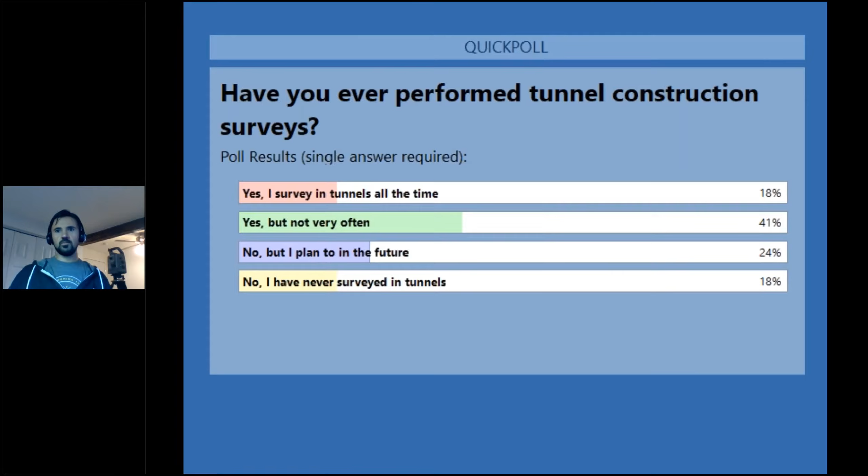All right, so I've got myself on webcam, hi everyone, and I've got my trusty Total Station in the background, which we're going to be using today. But first, we're going to go over a bit about tunnel construction, and then talk a little bit about what NATM tunnels are and the surveying involved. So let me dive into the slides here.

So why do we build tunnels? Well, there's really three categories: transportation, public works, and mining. In transportation, this is all about moving people by road, rail, or metro. In public works, it's more about moving resources—how do we get things like water, wastewater, utilities, and oil moved around? And in mining, it's all about resource extraction and moving that material in an efficient way. They all have different types of challenges and needs, both from the construction, design, and survey perspective.

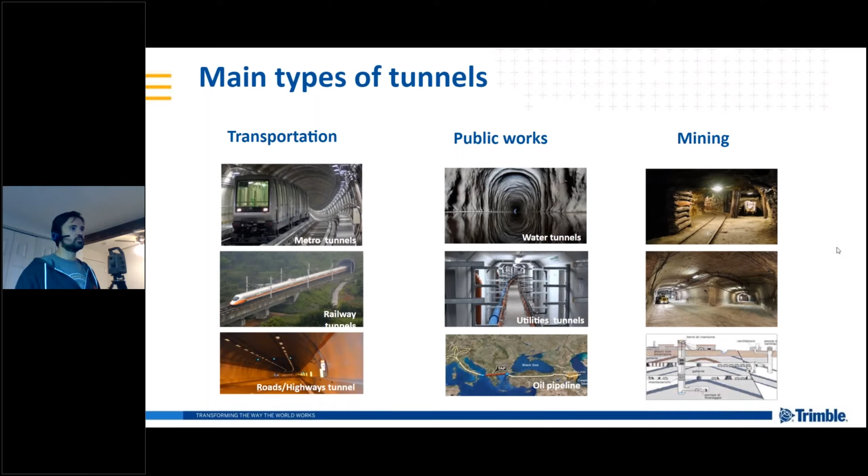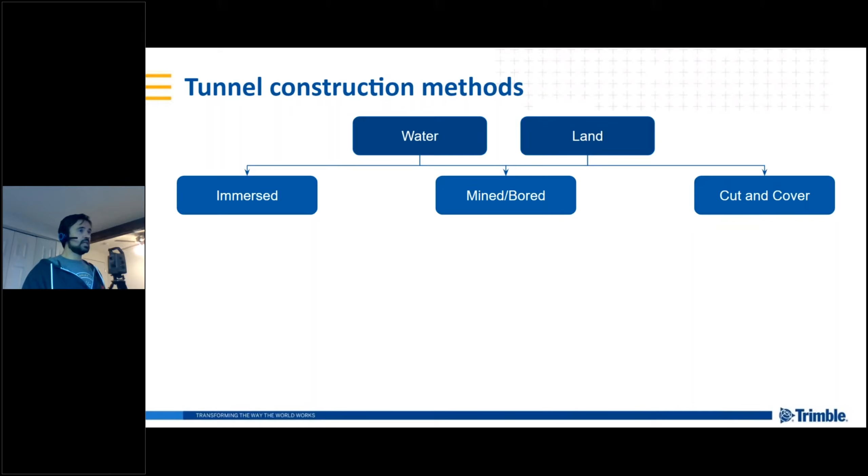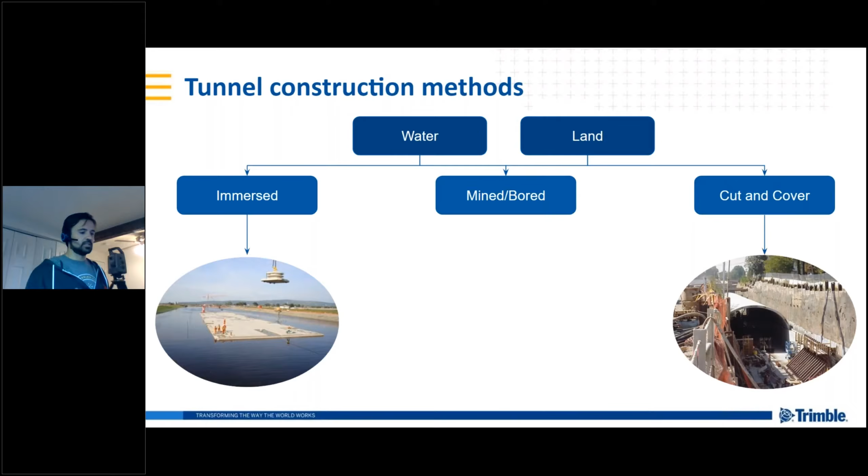Now let's look at some of the tunnel construction methods. This isn't the most comprehensive list, but we're trying to nail down the most prevalent methods used in the industry. They really depend on whether it's underwater or on land, and from there we look at three broad categories: immersed tunnels, mined and bored, and cut and cover. Immersed is when we take prefabricated segments, float them out to an area, and submerge them to the seabed before covering them up—that's why it's called immersed. Cut and cover is where we go from the surface level, cut down to where the tunnel will be, and then backfill after that tunnel structure has been created. It was typically quite prevalently used, but it's getting less common because of the environmental impact required to build that tunnel.

And then we'll look at the mined and bored category. There are three methods here, and the first two are probably the most prevalent used. The left-hand side is the NATM, or sequential excavation method, and that's what we'll be talking about today. In the middle is the TBM, or tunnel boring machine method, one of the fastest growing and popular methods of tunneling, as well as pipe and box jacking, which is used a lot in microtunnels and smaller diameter tunnels.

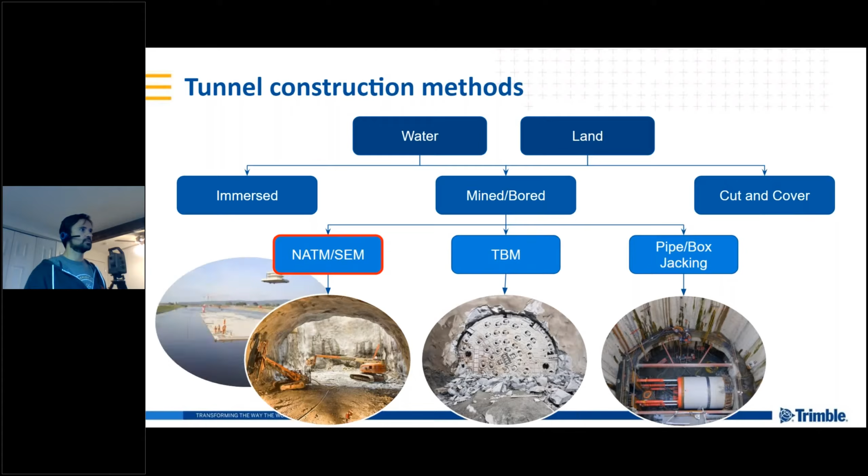So getting into the NATM method, or the new Austrian tunneling method, also referred to as the traditional method—it's a combination of drilling, blasting, and excavation to create the tunnel.

This can be through a variety of means, but I'll go through the general process, which is starting by marking and drilling out the holes in the tunnel face for charging, detonating those charges to break up the material, ventilating to get rid of all the dust and debris so it's safe for people, and excavating that material, removing it by loader or other means, typically called mucking in the slang term.

Then there's installing temporary support. This could be the arch, the ribbing along the side, usually surveying for the next section to understand the geology as well as how much material has been removed, and then reinforcing, usually by shotcrete, rock anchors, and a variety of other things.

This is repeated every so many meters depending on the geology and the surface. It could be every meter that we have to do this process, maybe every 5 meters. So it's a very iterative process.

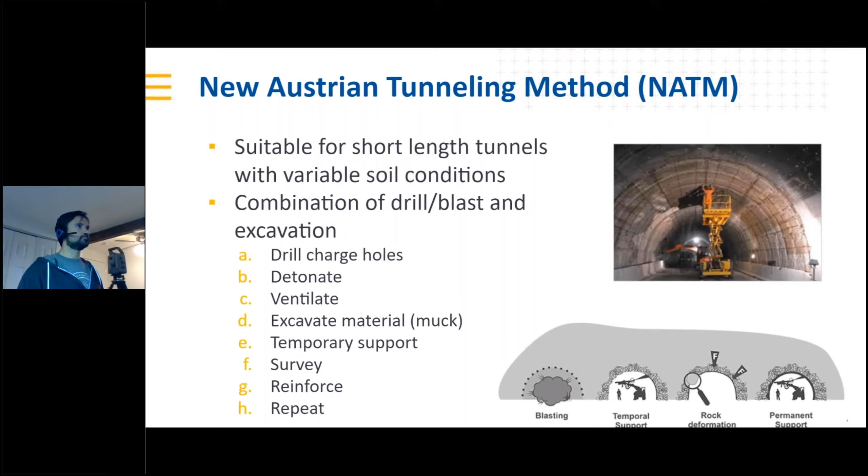Next, we're going to look at the workflows from a survey perspective that are used in tunnel construction, specifically in NATM. There are other things, I'll generalize these into categories, but I would say one of the most important categories is the geodetic and control survey, typically starting from outside and going into the tunnel.

Outside, it might be using GNSS static at each end of the tunnel to establish a good baseline for the control. Then as construction progresses, we move the traverse network into the tunnel, following along with the construction process. This is a quick, timely, and important process that needs to be performed.

There's multiple ways of this being done, and especially trying to maintain accuracy over long distances is a big survey challenge, and there are some different ways that that is done.

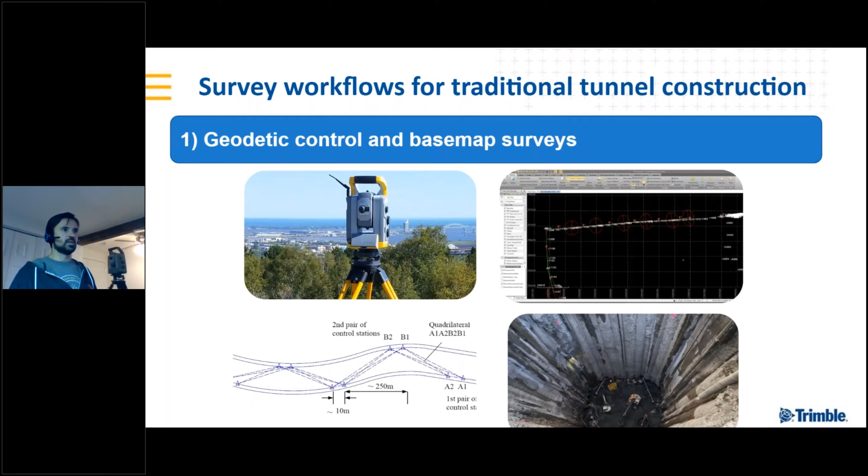Next, once the tunnel is started, we've got the control network established up at the top. Now we start to do the drilling and blasting, as well as measuring how much material is being excavated. This is guiding the drilling jumbo to drill and where to charge in the face of the tunnel, as well as collecting data on how much material is removed and helping the shotcrete crews and the reinforcement crews to put those rock anchors in and the proper amount of shotcrete.

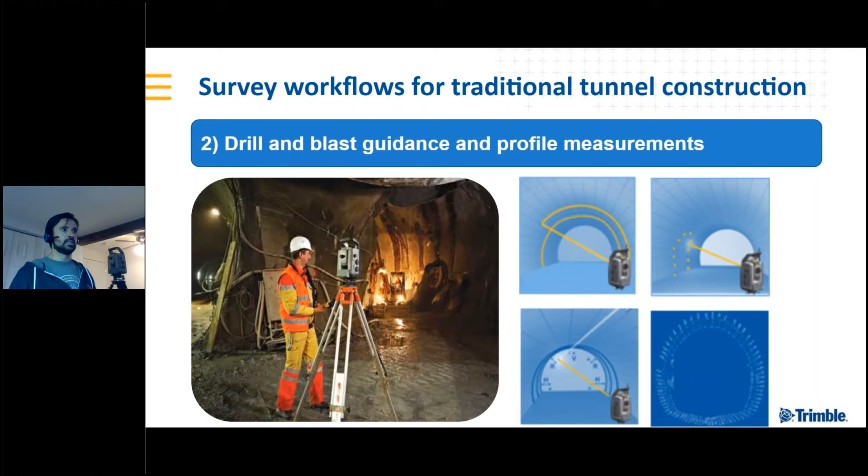Another key part of really any tunnel is deformation monitoring. This happens both in and outside the tunnel. Outside the tunnel, this is about understanding, alarming, and reporting to the necessary stakeholders all of the key infrastructure that is around and above the tunnel. This could be as simple as understanding whether a building is moving while the tunnel is being bored underneath.

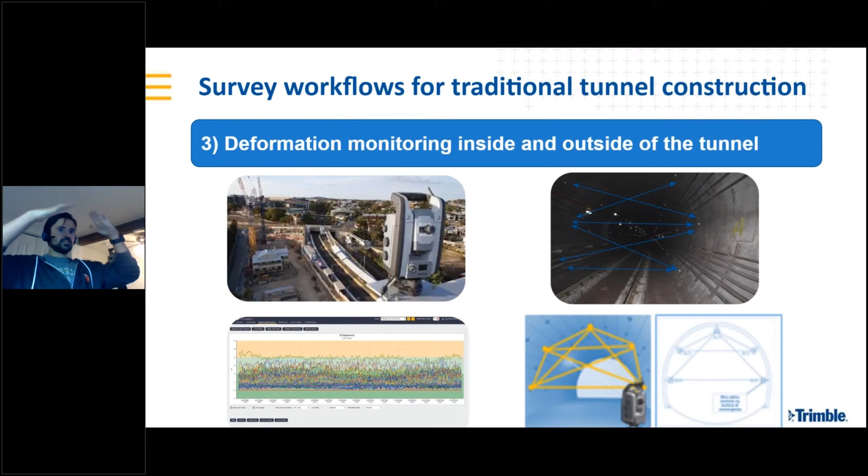Inside the tunnel, this is more about understanding the shape of the tunnel after it's been excavated, how it's deforming at key points. On the right-hand side, I've noted some reflector targets on the side of the tunnel. Those are measured in a campaign-based style monitoring and checked for movement relative to each other to understand if the tunnel is collapsing, maybe at the bottom towards the inverts, or at the top, getting a better idea of that movement.

The fourth and final category is more of the feature staking and the final as-built. So what is that tunnel actually for? Is it a road? Then we're building in the sidewalks, any drainage, putting in the asphalt, and all of the necessary things to essentially finish off the tunnel. It might be utilities overhead and ductwork, a variety of different things. This is where we see more and more scanning, 3D laser scanning being used as well.

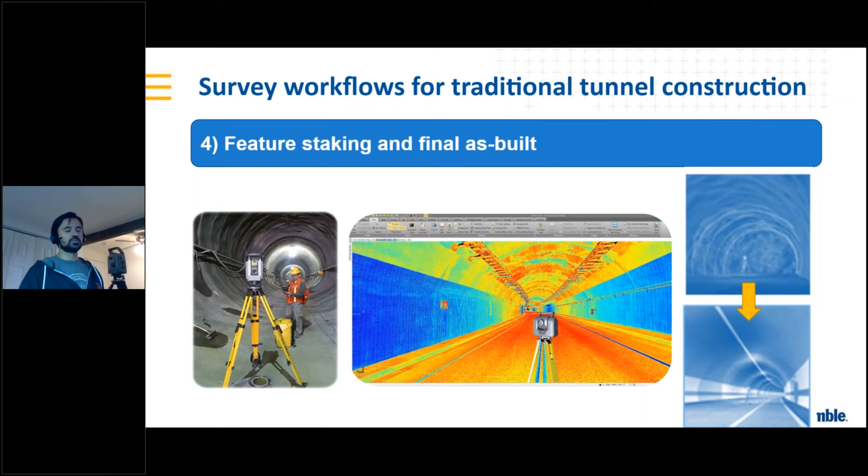So with that, we're going to go into a demonstration. First, I'd like to cover what the demonstration will include. First, we're going to start in Trimble Business Center, where we're going to use the tunneling module to essentially do data preparation and prepare our design for going out into the field.

And then in the field, transferring that design can be through a few different methods. It can be using Trimble Sync Manager, or it can be through the classical methods of a USB or email to the data collector approach.

Once it's in the field, we're going to be using Trimble Access Tunnels and the S-series total station. In this case, I have an S9 total station, and we're going to first review the design and make sure that everything that came or was in TBC came into Trimble Access.

We're going to do the setup of key points, so for rock anchors, blast holes, that kind of information, as well as machine positioning, really useful for drilling jumbos. And then we'll do an auto scan.

So how do we collect profile data for understanding the volumes in a more automated fashion, and then some in-field reporting as well. From there, we'll take that data and transfer it to Trimble Business Center tunneling module, where we'll do an as-built analysis, a more complex understanding of the data collected in the field, and overbreak and underbreak reporting. And if we have some time, we'll also get into cross-section and sheet creation.

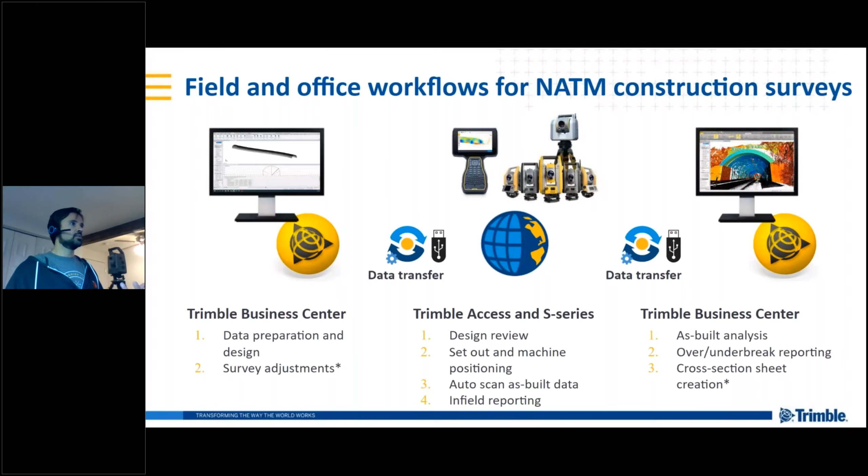Now where do we go from here? We're going to go to the Tunnels tab in TBC. I really like the layout because you progress from left-hand to right-hand side in a workflow sense—so we've got our tunnel alignment. You could also edit the alignment and create labels for that alignment. What we're going to start with is creating the actual tunnel design.

So first you create a tunnel corridor, which I like to think of as a container for the tunnel design. If you have multiple tunnel designs, for instance a northbound tunnel and a southbound tunnel, you could put both of those in one corridor—that's the primary use for it. So we'll start by naming that corridor. We've already got our alignment selected. Press OK.

And then the next thing is to create the tunnel design. You'll see on the left-hand side, as we go through creating the tunnel design elements, that they'll populate in the Project Explorer tree over here.

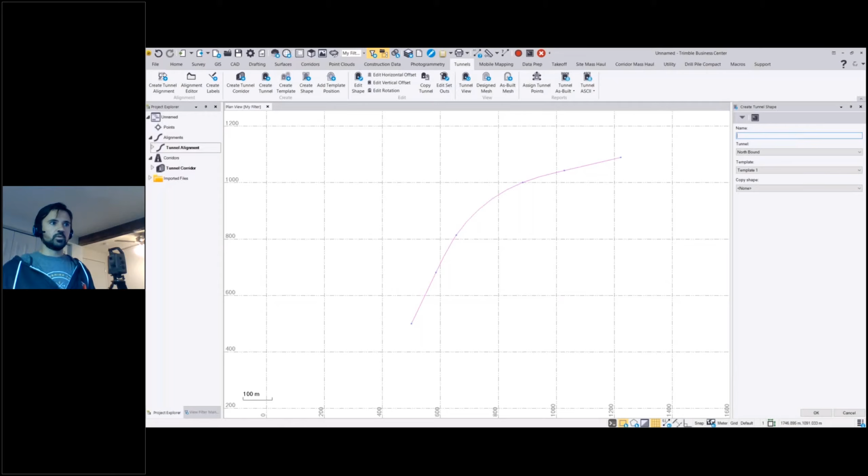So this is the geometry. If you're familiar with corridors in TBC, this is like your cross section - essentially the same thing. You're defining how that shape looks, and you might have multiple shapes. So in that template, you might have 1, 2, 3 shapes, and why that's important is shape 1 might be your outer diameter, your excavated surface, and shape 2 might be the inner diameter. It might be finished lining, might be shotcrete surface - could be a variety of different things.

So let's just call this outer diameter for now. And once again, if I had an existing shape, I could copy it, but I don't, so we're going to go from scratch.

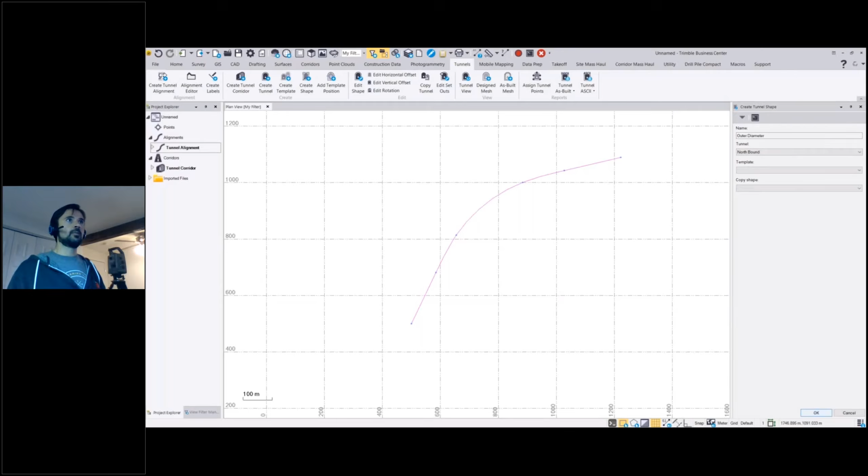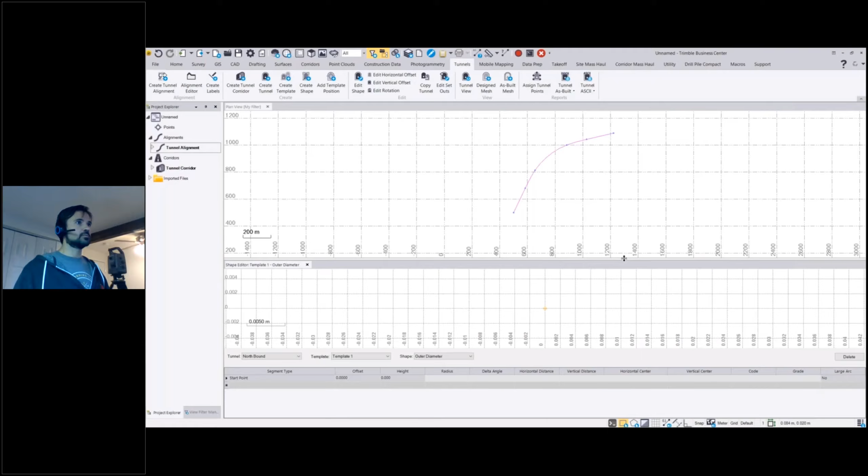A lot of the time you might be just given a stack of plans with all of this information on it and not have a design. So this is where using these tools in TBC is really helpful to get this data prepped, ready to take out to Trimble Access. If you're power users of TBC, you probably know this, but you can drag views around. So I'm going to drag the shape editor here up to the top, and I'll just close the plan view, so now I've got a bigger area to work with here.

So first, the view at the top is essentially our cross-section view, and we're going to add elements. We're going to start with a start point, and I've got some notes here of what kind of design I want. So we're going to start by creating a start point, and you'll see that populate in this view as we go through. The first thing I'm going to do is a line - there's a variety of different options here for creating different geometry elements for the design. I'm going to use a simpler one, line elevation and offset.

So in this case, let's see, I'm going to go -0.5 and create that. And now you'll see automatically that line created in the view. So I'm going to go ahead and create some more elements.

Might be a good time - I don't know if there's been any questions, Jeff, but if there has been any, feel free to pop those up and I can answer them while I do these. Yeah, we had one other question, but I'm waiting for some more detail around it. Sure, when that comes in, I'll go ahead and ask.

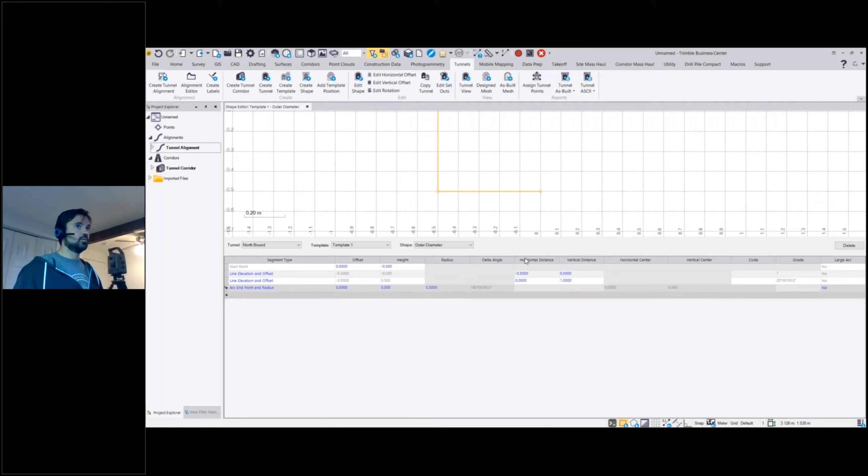We did have another question come in from Hassan: does TBC have a module for deformation monitoring? The answer to that is not at the moment - good question though. I think we all want to see it, Hassan, so I agree with you.

All right, and then here's the last point to finish off our tunnel design - so kind of what I would call maybe a standard horseshoe shape type tunnel design. So we've got all those elements keyed in, we can kind of view that before we do anything else. Awesome, we've got that tunnel shape ready.

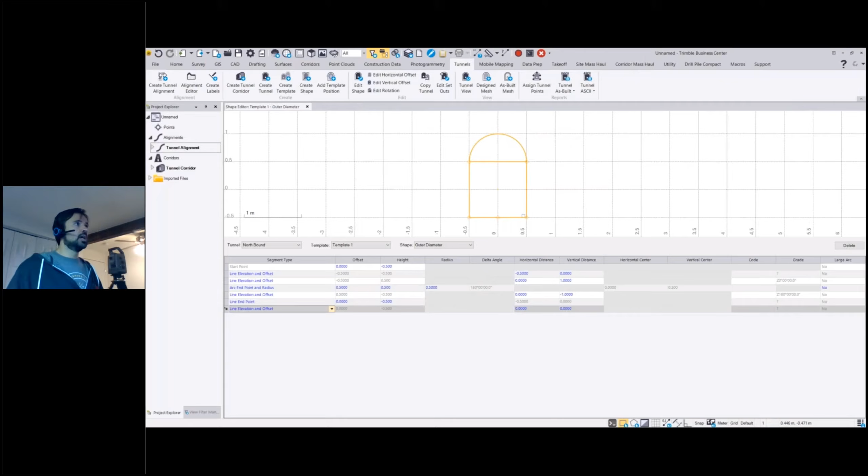The next thing we can do is visualize that in 3D. So here we've got the design tunnel mesh tool - click on that.

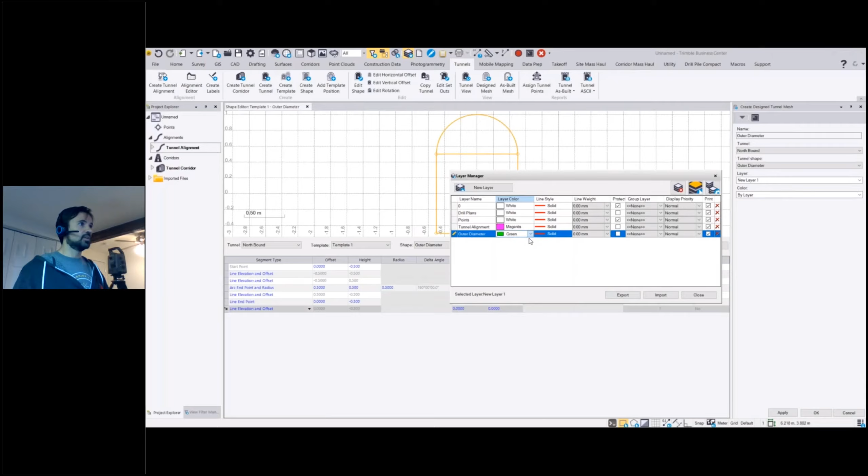And you select your tunnel shape and give it a name. I'm going to call it outer diameter. If we want, we could put it on a layer. One thing you might not know is if you press spacebar, it'll automatically bring up the layer manager. It's kind of a tip and trick in TBC that I like to use. Let's give it a fancy color so we see it well.

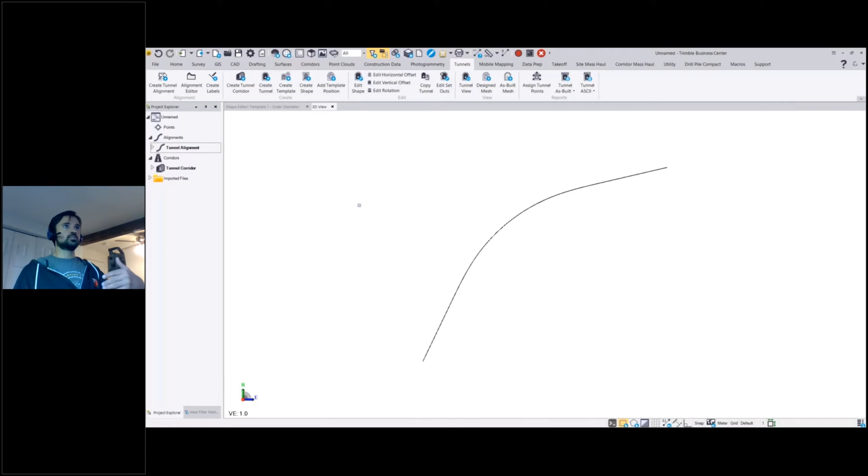You're not going to be able to see this because I don't have a view open, but that's fine. So at the top, we're going to click the 3D view. Now you'll notice we've got a 3D mesh of our tunnel design. It's taking that shape, taking the alignment, and creating a 3D mesh along the whole alignment. You can see that in any of the views, plan view, 3D view, station view, they're all there.

Next, what I'm going to cover is a workflow that's more prevalent in NATM tunnels, which is set out points. These would be key features like blast holes. They would be set out points for rock anchors, reinforcing the sides of the tunnel. They're similar in a sense to stakeout points in terminology, but set out points are more for tunnel specific workflows.

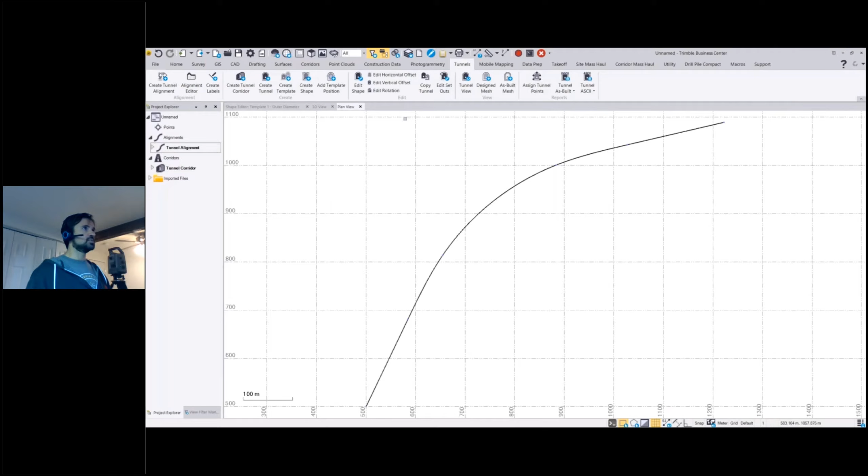So in TBC we've got this Edit Setouts. I'll hit that, and that'll open up another cool thing, the tunnel view. If you're familiar with the TBC tunneling module in the latest version, 5.3, we did some updates to the tunnel view to make it a more comprehensive way to view all your designs, shapes, set out points, offsets, and rotations, all in one centralized view. So I'm going to go through that and you'll see some of the new things as I do.

On the left-hand side, there are options for the shape. If I click on shape, you'll see the existing shape I've already created. But what I want to do is the set out points. There are essentially four different types. The radial is especially used for rock anchors - you're essentially projecting out an offset based on the center point, radial out to meet the tunnel design. You'll see what I mean when I enter that point.

So let's start with that. We'll go radial. You put in a start station and an end station. If you wanted this applied at a range of stations, you could do that. In this case, I'll just put it at 1200 for demo's sake. Then you apply the offsets - I've got some offsets here. You could also offset that center point which the radial will be projected out from. In this case I'll leave it at 0. Then the last thing you need is a shape, so I'll select my outer diameter shape.

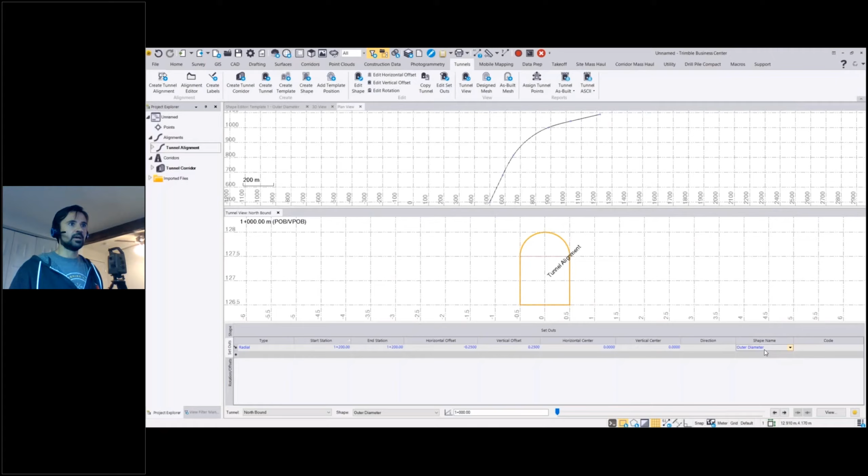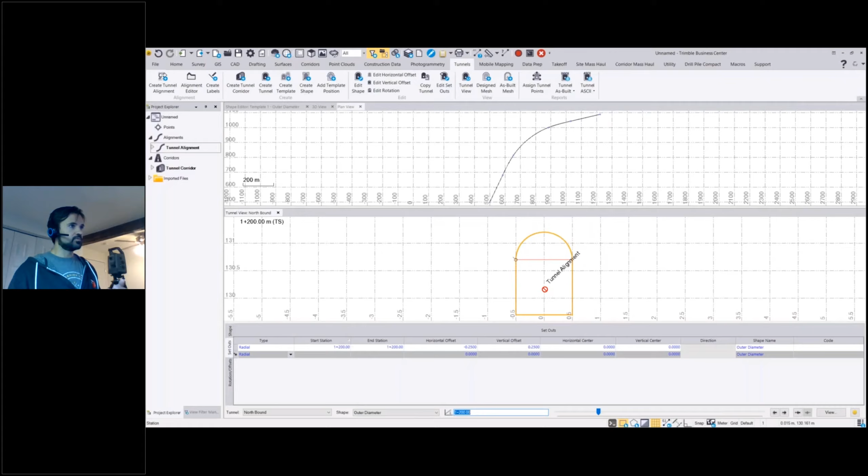And see it's computing that. Now, I don't see anything right now because it's at station 1000. I can navigate using the slider at the bottom, which goes through the whole tunnel, but I want to input that station directly. So let's go 1200 there. Now you'll see that point here - that's the radial set out point I've created. It's essentially gone from the alignment and projected out at that offset to meet the tunnel design.

Next type we'll look at is the horizontal. Same thing - put in some stationing, and it only requires a vertical offset here and then a direction, so is it going left of the alignment or right of the alignment. Let's do left, and then the shape. Now if I tab to the next one, you'll see that's created. So as it sounds, horizontal - instead of projecting out radial, it's projecting out horizontally in that direction.

Likewise, there's a vertical - same principle. It's going to project that out in a vertical manner. I'm going to have this one project up, and now we've got a vertical point as well. Then the last one, which I think is quite common, especially in NATM tunnels when you're marking out blast holes on the tunnel face.

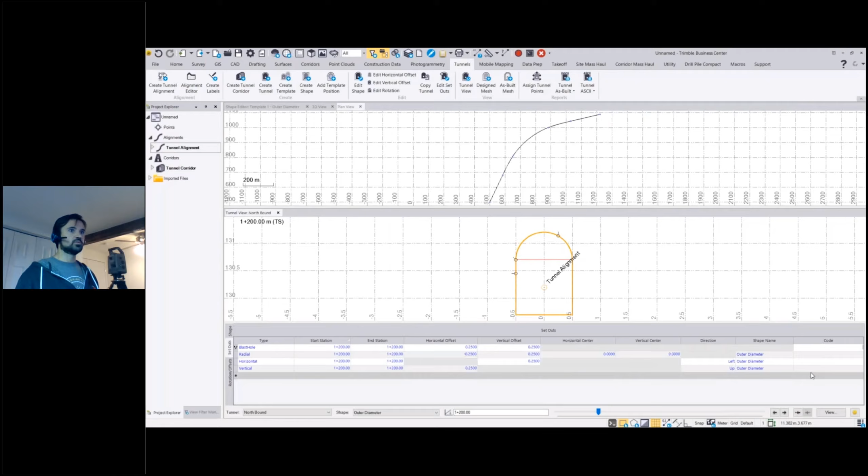Same process - you enter... had some issues there. Start station, end station, and the proper offsets. You don't need a shape for this one because it's just going to strictly apply that to the tunnel center. Oop, looks like I'm missing it somewhere. Let me try and create that one again.

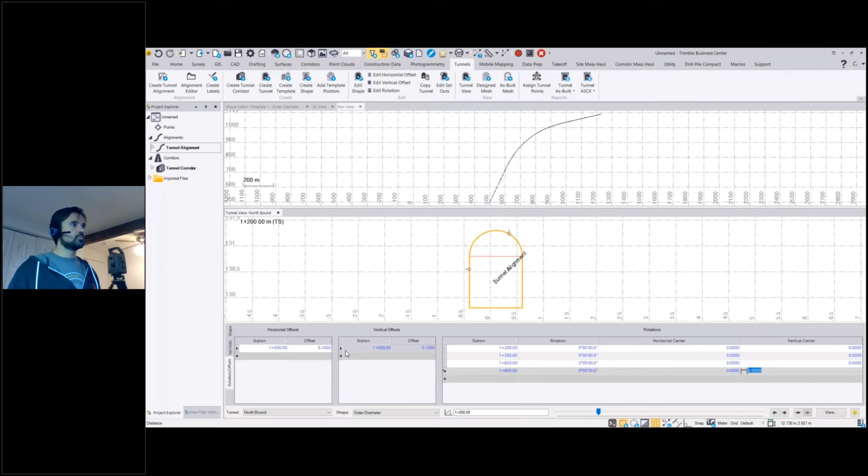Cool, so now with the little slider bar, I can see how that looks. You'll notice as I slide across, that design tilts 5 degrees and then it'll tilt back. The reason I show that is it's quite common, especially in metro or road tunnels, where you have to rotate along curves to counteract those forces going at speed.

All right, so we've got the setouts, our offsets, our rotations. The one last thing I'd like to cover before we get into the field aspect is multiple shapes. In this case, we've got one shape, but let's say you wanted an inner diameter surface - we can call it the shotcrete, or the tunnel lining. Easy way, you can go to the Create Shape menu and create another one.

We'll call it inner diameter, and use this copy shape function. So I can select any existing shape - we'll use the outer diameter and just apply an offset. If I know the thickness of shotcrete is going to be, let's say, 0.1, I can put a negative 0.1 offset and hit OK.

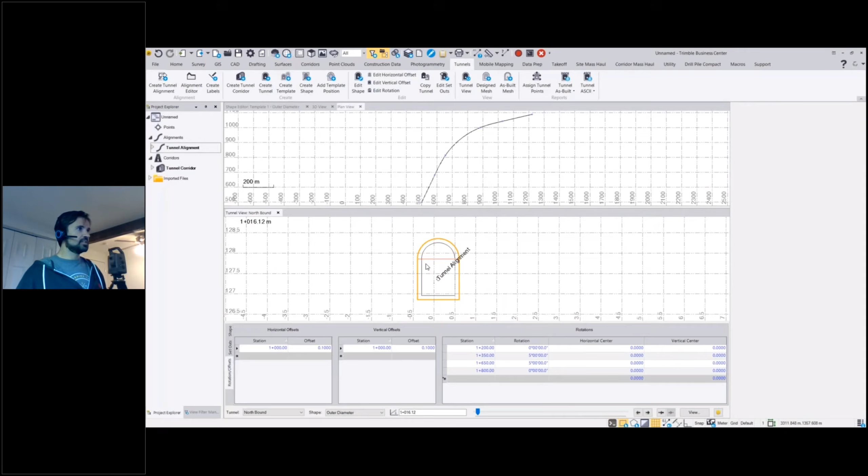Excuse me. And now in the tunnel view, we've got both shapes. Let me close that shape editor. In the tunnel view, we've got both shapes, the inner and outer diameter.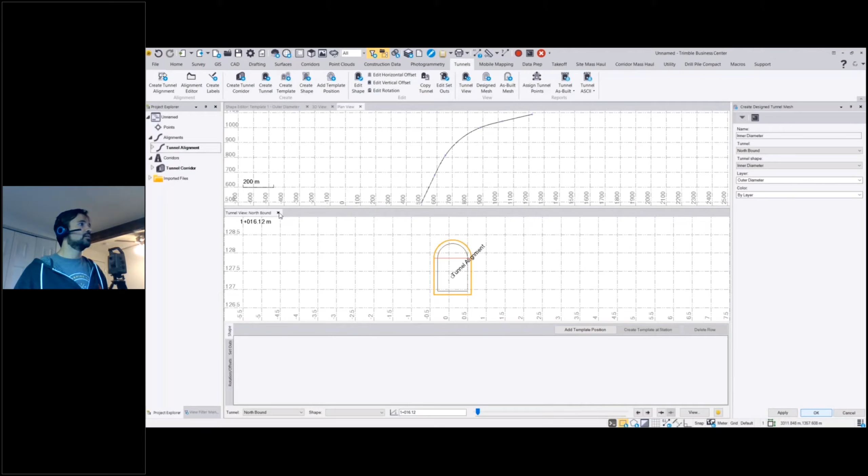And likewise, you could create a design mesh for that inner diameter as well. So I can press OK, create that, and now if I blow up the 3D view here - they're the same color, but let's change one of these to make it a little more clear. You have both shapes, so you can have multiple shapes in a tunnel design.

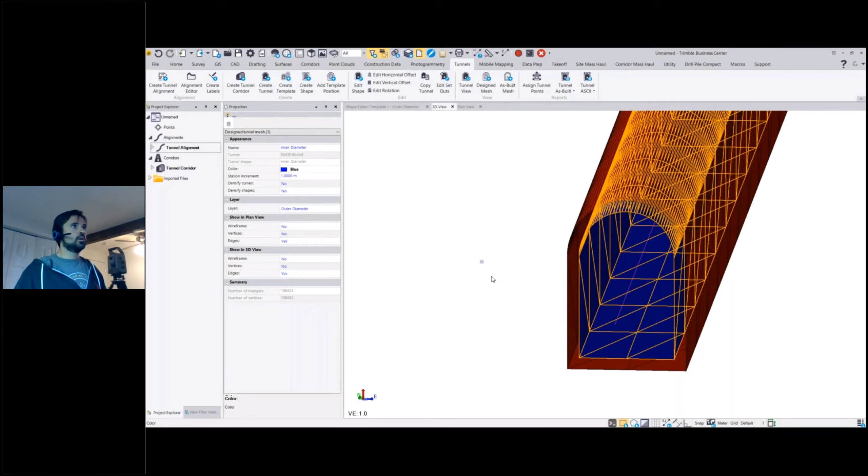All right, so we've got all of our tunnel design data prepped, ready to go for the field. The last step is to get that out in a format. We've got an export format between Trimble Access and TBC called the TXL, or Trimble Tunnel XML design template. Under the export menu under corridor, you'll see the TXL tunnel exporter. You select all the necessary information, then export out, and you'll have that .txl file, which you can bring into Trimble Access.

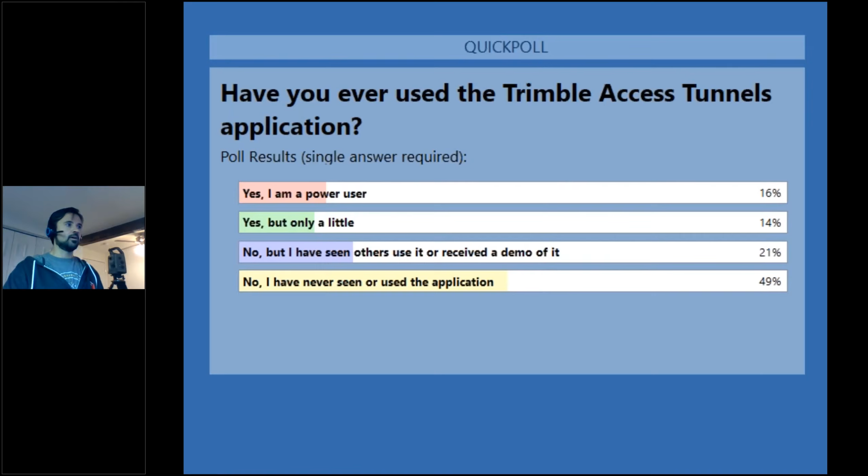You can probably see if my webcam is still operating. I've got an S9 set up here, connected to Trimble Access, with that tunnel design. I've got the total station set up with a simple backsight setup, and I'll be using the laser pointer today, no prism, pointing at my wall here in this room.

If you're not familiar, in Trimble Access we've got several different modules you can use aside from general survey, which is the one most people are familiar with. The one we're going to cover today is tunnels. In tunnels, we have essentially 5 categories of features.

We have define, which we'll go into first, which is more about looking at the design information. Then with survey tasks, machine positioning, which is used for positioning a drilling jumbo, reviewing any of the data that's been collected, and then reporting on that as well.

Jumping in right away, we're going to look at define. The cool thing about this is you can create a design in essentially the same way you did in TBC as in Trimble Access, and you can transfer that data using the TXL format between the two.

In this case, I've got the similar design that we created in TBC here in Trimble Access, and I can click on that, and it's got all of those elements. I can look at the horizontal alignment and see all of the lines, the arcs, the curves. If I want to edit any of those pieces of information, I can click edit and add that.

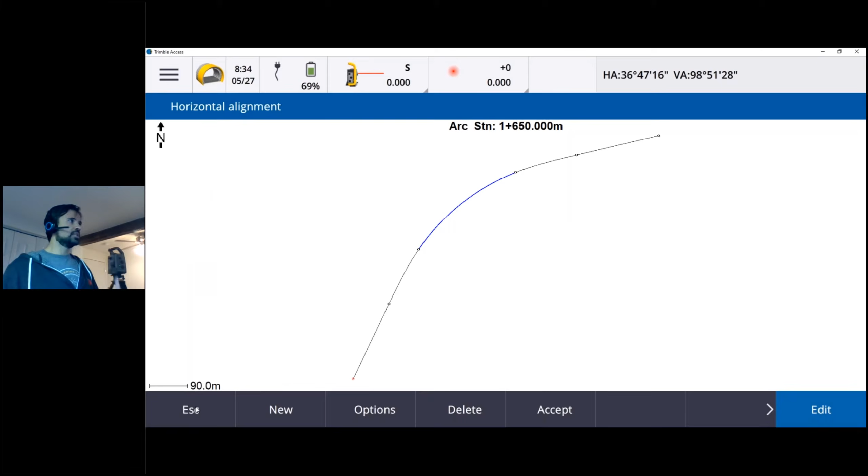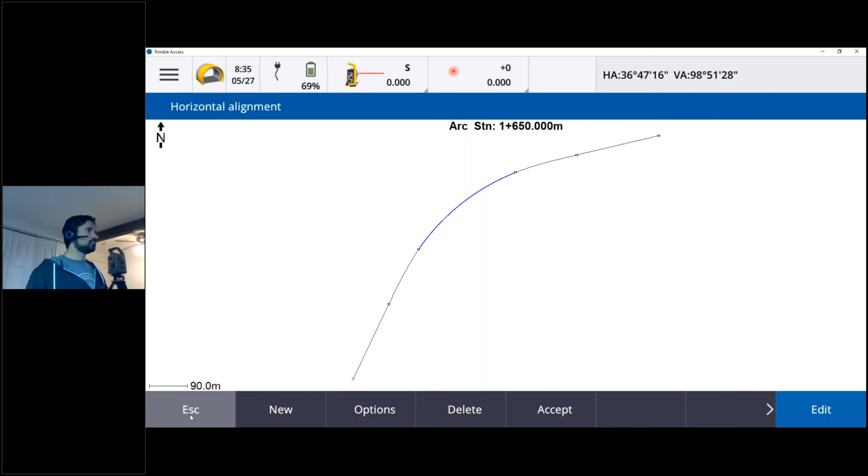This is a really useful tool, especially if you're in the field and things need to change or are revised on the go - you can do it in Trimble Access without having to crack open your laptop and open TBC. It's got all of the other information like setouts, alignments, basically anything we created in TBC will be there.

The next part we'll go into is the actual survey piece. We've got a few functions that are very familiar in other parts of Trimble Access, like measure surface and station elevation, so I won't go into those for this video. I'm going to go into the more tunnel-specific ones - those 3 here: Autoscan, position in tunnel, and setout.

Let's start with the setout. That's essentially the logical step - you're going to be setting up blast holes for the excavation, or you might be doing rock anchors for support. So you select the TXL, and you could have multiple TXLs with different points and different designs. Then you define a station range.

In this case, I know I've got some setout points at station 1200, so I'm going to put that in. I could also put in the interval - say every 1, 5, or 10 meters I want to set up those points. In this case, for time's sake, we're only going to do one interval. I know, disappointing, but nonetheless, we're going to get into it.

There are two views in the setout menu: a plan view looking down on the alignment. I'll zoom out a bit and you'll see how the dotted red line shows where the total station is looking - if I move this a little, you'll see it updates. The green line is the offset alignment - remember we had an offset in our design - and the black line is the original position of that alignment. You'll see we're pretty close to station 1200.

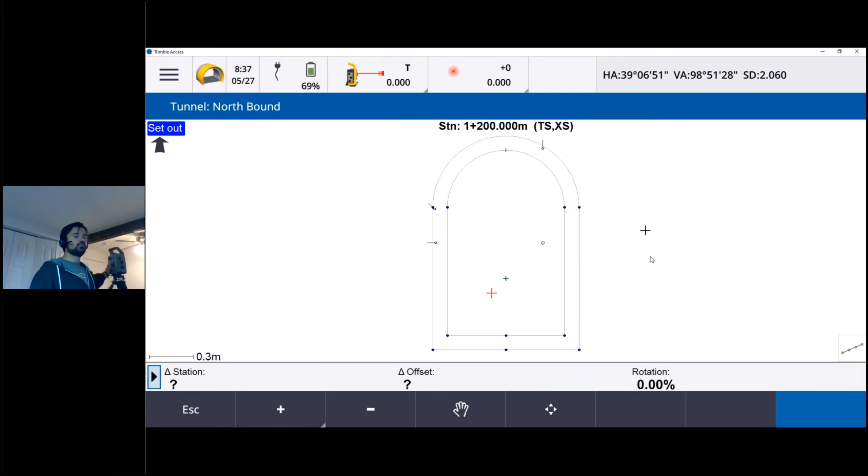Now if I click on that blast hole, I'm going to use this auto feature here. If I click that, it's going to ask me for a tolerance - what tolerance relative to design do the points need to be set out to. Then I can press accept.

And then we've got some settings for setting out points. So we put in a start point. I can call it whatever I want - I can call it Riley's point number 1, or I can call it 20,000.

The EDM timeout is pretty important. What this is doing is it will measure for 5 seconds, and if it doesn't get a return in that time period, it's going to move on to the next point or finish up. This is important because sometimes you might be measuring to a really fine corner, or the surface may be really wet, or just hard to get a good EDM return on. So you want to have that on, so you know that you missed the point, but also that you're not waiting forever for it to measure something. Usually 5 seconds is probably more than enough.

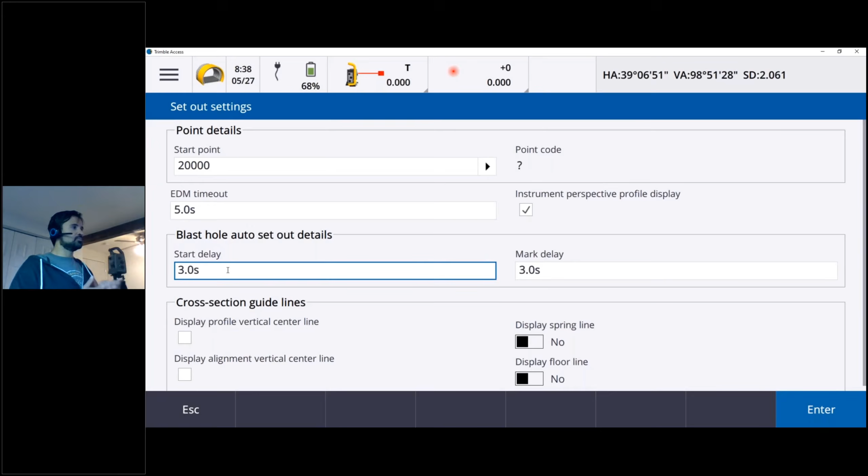This auto set out details is really important. When you're setting up points, especially blast holes, you could be by yourself. You might want an automated way of setting out those points. So what this does is puts delays on both ends of the measurement process.

First, the total station will point to the location of the setout point, and it'll give you a delay so the surveyor can walk up and mark out with spray paint or whatever it is on that face of the wall. That mark delay gives them time to mark it out and then move on to the next point before the total station actually turns - an automated way of both marking out and getting the position from the total station.

So you can have those set up. There's also some other options here, cross-section guidelines for visualizing in the cross-section view, but we won't get into those now. Press enter, accept.

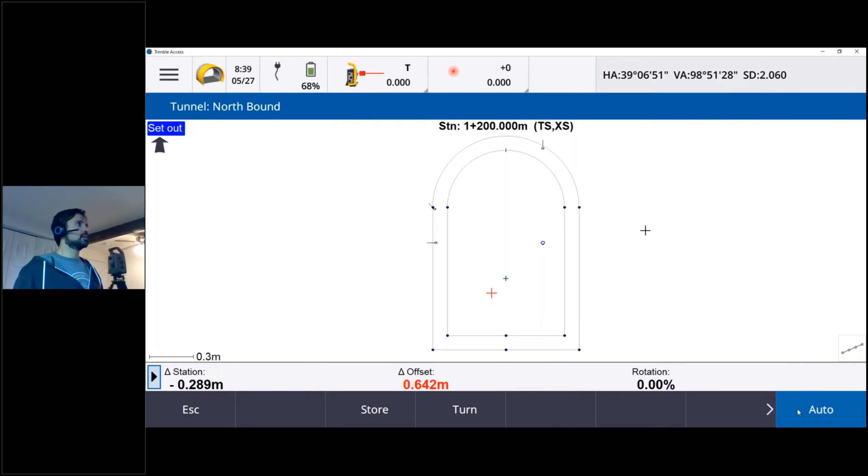You'll notice that little black cross there automatically turned to the position. So now the total station's measuring, and once it knows it's at the location, it's going to first of all audio and visually say mark point - you see that in the bottom right hand side. So I can store that position of that point.

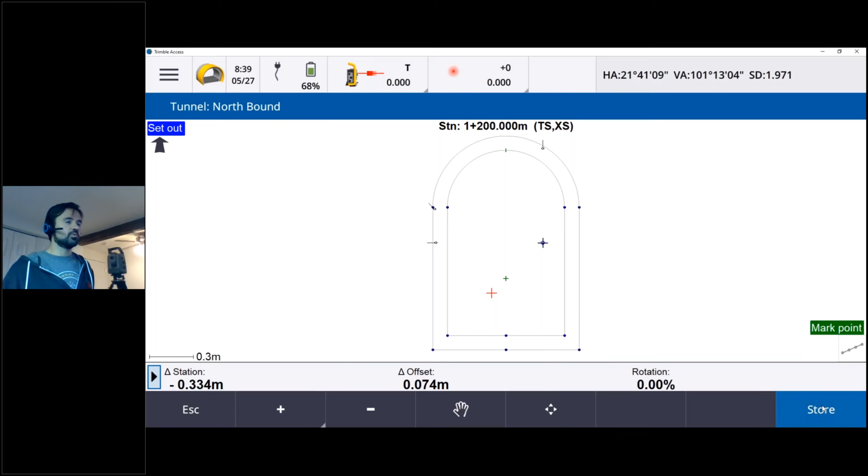If I had multiple points, it would move on to the next ones and so forth, but in this case I only have one blast hole, so I'll store.

All right, so that's the set out feature, and now I could set out any of those other points, but for time's sake, we won't do it in this demo.

Let's go back to the main menu, and we're going to go into the next feature, which is Autoscan. This is personally one of my favorites. It's a semi-automated way of collecting profiles along the tunnel design.

A common use case: all the material has been excavated, and we need to know how much was removed and if there's proper over and under break. If you're not familiar with over and under break, it's very similar to cut and fill. Over break is how much more outside of the design we excavated, and under break is how much we didn't get excavated to the design, so how much more we need to actually excavate.

So instead of putting in a station range, I'm going to just hit the measure button, and the total station will take a measurement and give me the station where I'm at. So I'll use that station. We're only going to do one interval, but if you wanted to measure every 1 meter, 20 meters either side of the instrument, you could do that.

The last thing is to specify a surface, so we could choose inner or outer diameter. In this case, let's go with outer diameter.

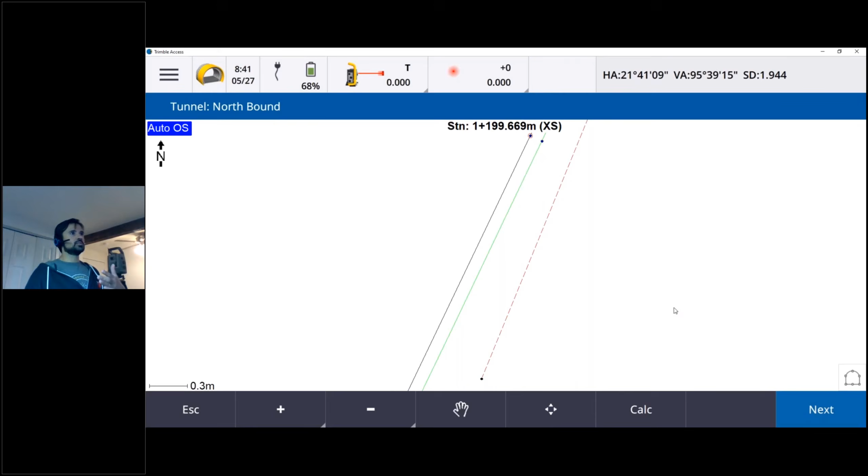Once again, we've got the plan and cross-section view. If we go to the cross-section view, same thing - you'll see that black cross, which is the total station, you might even be able to see it behind me moving and turning to that position.

And I can see on those key points where we're lying if it's going to be over and under break. But the real power here is using the actual auto scan. So first we'll hit start.

Before you can get into this, you need to specify the settings. Once you've got the settings specified, every time you hit auto scan, it's just going to run through the auto scan based on the last settings. If you want to change those, I'll show how to do that in a minute.

First, like always, we need to specify point range. If you want to use a code, you could. I've got a feature library in here, but in this case I don't really need them, but the option is there. The scan interval defines how many points along that shape you'll be measuring. In this case, every half a meter I'm going to measure a point, which is probably more than enough.

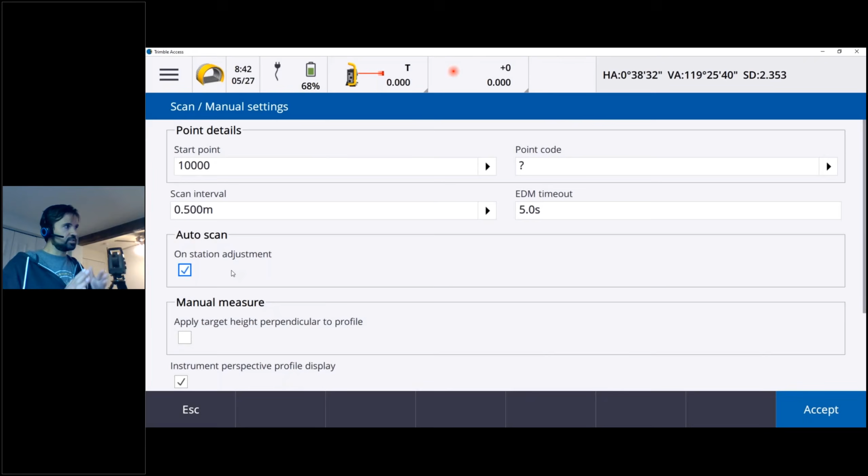And then I'm going to have an EDM timeout. I'll change it to 5 seconds. This last piece I'll cover in the settings is the auto scan on station adjustment. This makes adjustments for the total station's position. If it's not directly perpendicular to the surface, it'll adjust relative to that station. It'll measure and then adjust the total station position to get it on the right station.

And then we need the tolerances. This will be for the station as well as the overbreak and underbreak. Let's set 5 centimeters for the over and underbreak, and then press enter. You'll notice as soon as I hit accept, the total station is going to start measuring.

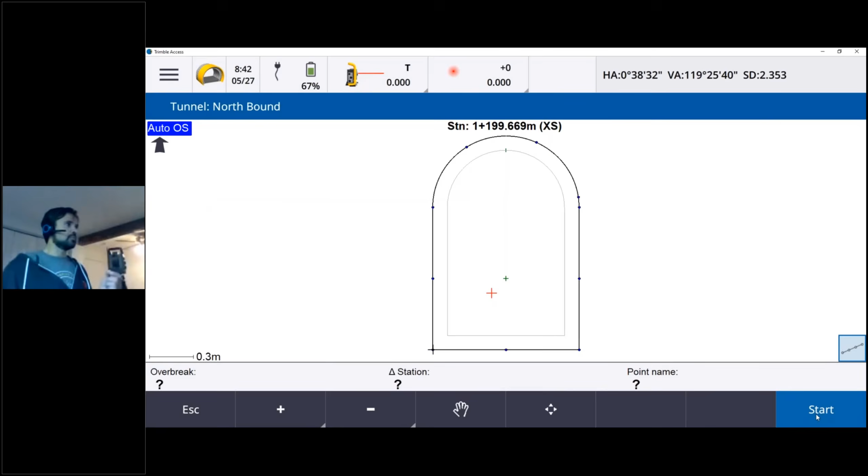It's going to start on that first point. You can probably see it behind me here. It'll measure, and once it gets a point measured, it's going to move on to the next one. You'll see it creates points as it goes. That green means it's within the tolerances that we set, so that 5 centimeters that I set before.

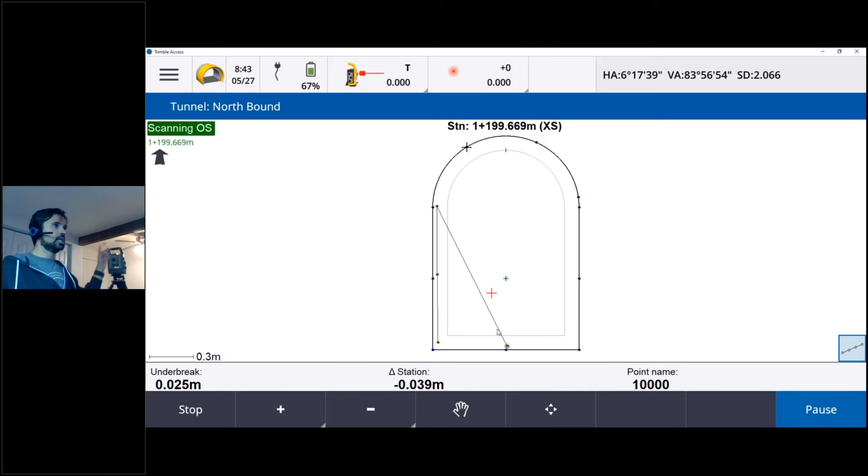So it's going to go along and measure the wall surface here. Hopefully maybe we'll hit some underbreak or overbreak so you get an idea of how that looks in Trimble Access. You'll notice at the bottom here we have this data tab where it's showing the underbreak or overbreak values in delta relative to that station that we selected.

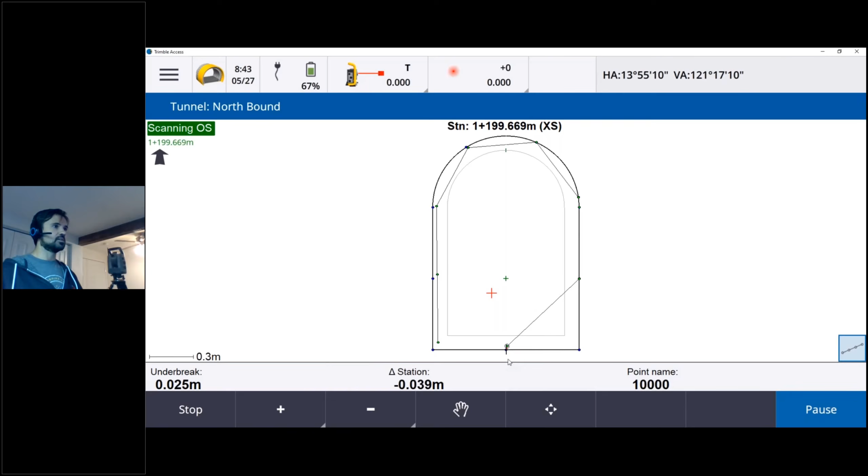So I think this point will hopefully be overbreak or underbreak. It's going to hit a little cabinet here in my room. We'll see if it gets there.

Once that profile is done being measured, it's going to come up with a results page. In this case it says errors. The reason it says errors is either points were skipped or points were outside of tolerance. In this case, a point was skipped, probably because it ran into that issue there, or that counter I had there.

So what we can do, now that we know there's a point skipped, is I can look over here and say okay, that was the point that was missed. And if I want to, let's say, direct the construction crew to that specific point, I can click, and now the total station will point and use the laser pointer to notify that location.

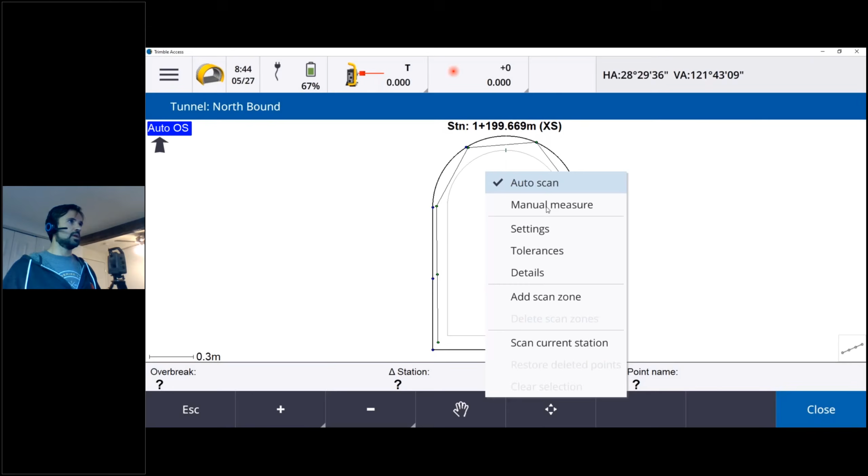So that's the auto scan in a nutshell. If you click and hold on the menu here, that'll bring up a variety of different features. So there's a way to just manually measure.

So if I wanted to measure a point, let's say right here, I'll move it over a bit so it's not on that corner. I can store, and it'll measure a point in that location. So if I just want to collect some more points along the profile, I can do that.

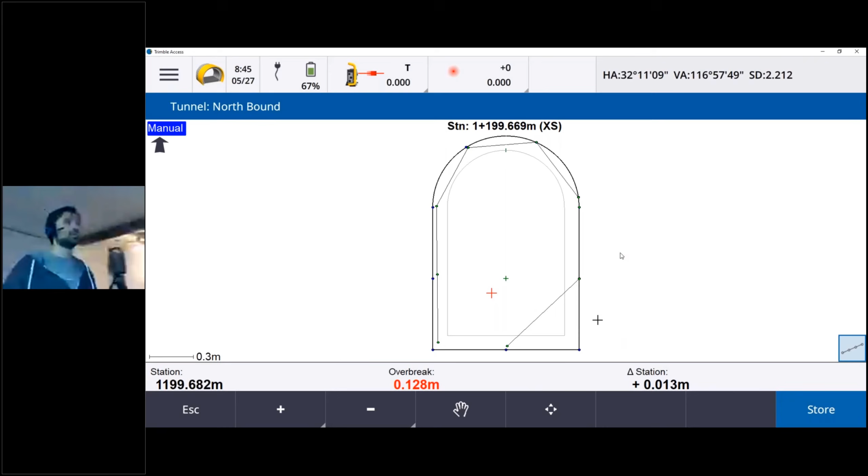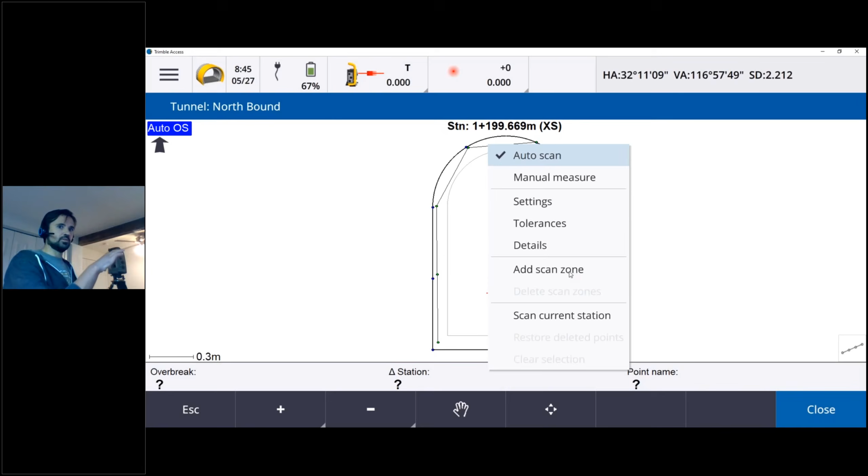If I go back to the auto scan, there's also the scan zone. Let's say there's, which is common in tunnels, a big ductwork running down the top of it, and I don't want to scan that because it's just going to ruin my profiles. I can add a scan zone, and that'll allow me to point the total station in two areas to define where I actually want to scan.

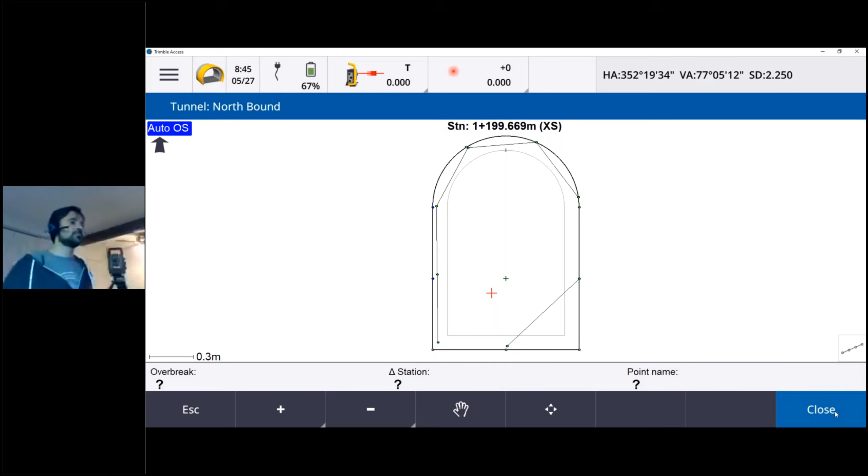So I hit scan zone. In this case, let's say I want to measure just on the left-hand side. I'll press accept for the first point, and then it asks me for the end of the scan zone, and then I can point it to a second location, press accept. Now between those two total station positions is where it's going to scan and nowhere else. And you can have multiple scan zones as well.

So that's the Autoscan feature. Going back to the main menu, I think we're running out of time, so I'm getting too excited about Trimble Access Tunnel. I'm going to try and tidy this one up and go back into TBC. So the last one is position in tunnel.

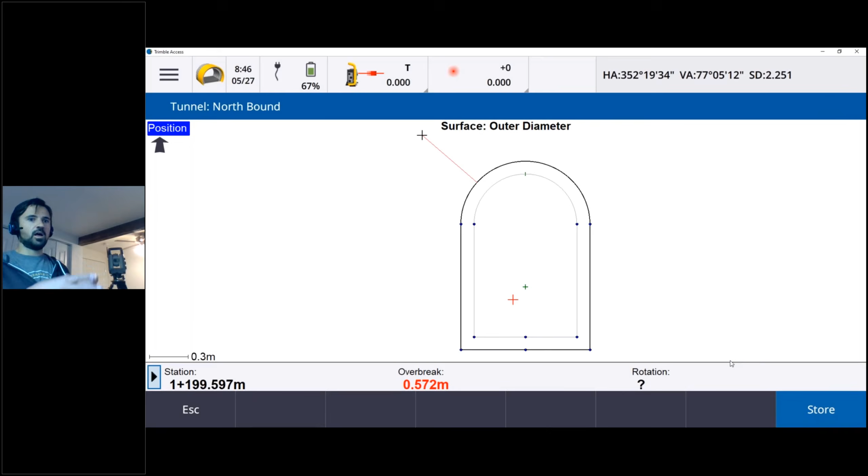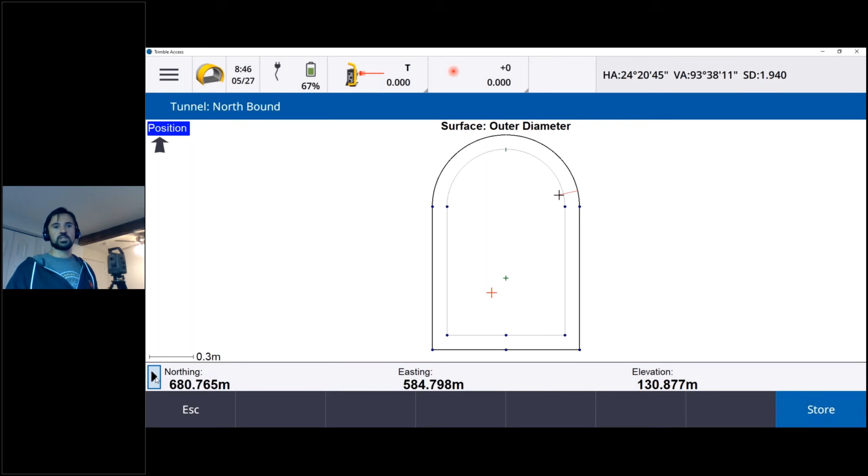This is essentially a really simple but powerful feature. It's giving you the position of the instrument, or wherever you're measuring, relative to the tunnel design. As I turn the total station, it's updating all those values relative to the tunnel design. I can tab over here on the bottom to show different values if I want to understand the horizontal vertical offsets, if there's a rotation, or if I'm just looking for standard coordinates. So all that information is available, and I can store those as regular points.

The machine positioning, next thing I'm going to show, is typically used for positioning drilling jumbos. So if you're drilling into the face of the tunnel, you would provide a tunnel face. I'll just hit measure, and that'll get me a station of the tunnel face. And then the drill depth - if I'm drilling to, let's say, 4 meters, press enter, and what it's going to do is create a reference line based on that information: the design, the station, and the drill depth.

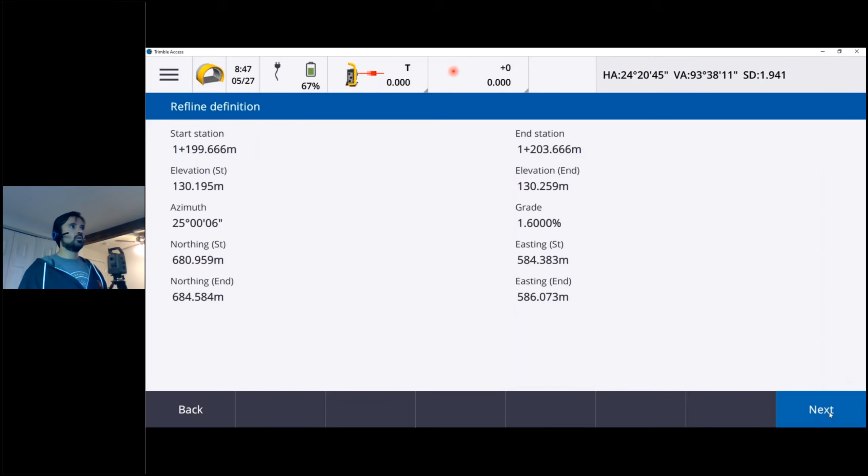Now when I hit next - whoops, I jumped too far. Let me go back to that. Machine positioning, getting too excited. Measure, and then drill depth. When I press next, this is essentially the machine positioning screen.

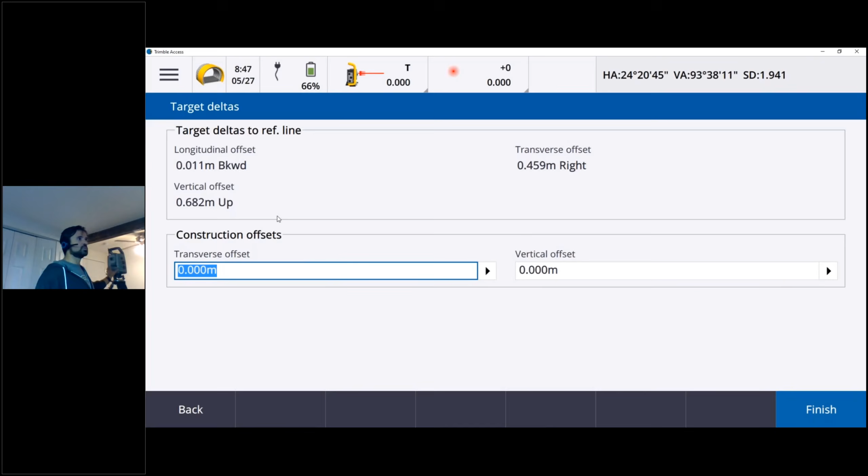So it's going to give you 3 offsets: longitudinal, which is forward, backward along the alignment; vertical, up and down relative to the alignment; and transverse, left, right. And if there's a construction offset necessary for whatever reason, that's there too. As I move the total station, these values change. So if I wanted to try and get it closer to zero, I could move it over, and then we're getting kind of in the area. It's a pretty straightforward feature, but nonetheless powerful.

All right, so to finish that up - we've done all the data collection, we positioned the machines. The last two things are kind of reviewing the data and reporting on it. So if we go to review and click on one of these stations, we can select a station here. I've measured at 2 stations - I did the set out point at one, and I did the auto scan at the other.

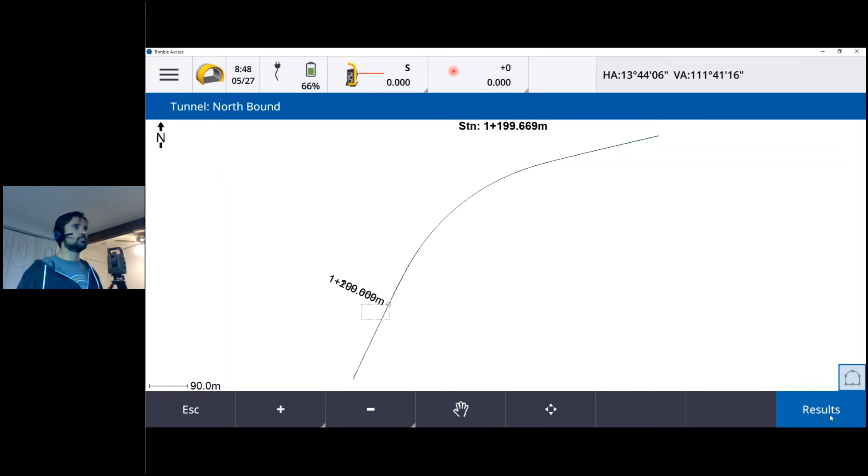So if I click the auto scan one, press accept, and go to results, I can look at all of those scan points. Doesn't really give me a lot of detail, but it tells me how many were measured.

Now, if we go into this menu, I can get that cross-section view of the data again, so if I want to go back and see anything, I can. There's also the same kind of click and hold menu to select different things. And if I want to get the details, this will give me a more descriptive analysis of what was collected. So if I look at this point, I can see the grid coordinates, the underbreak, station delta, and a variety of other information.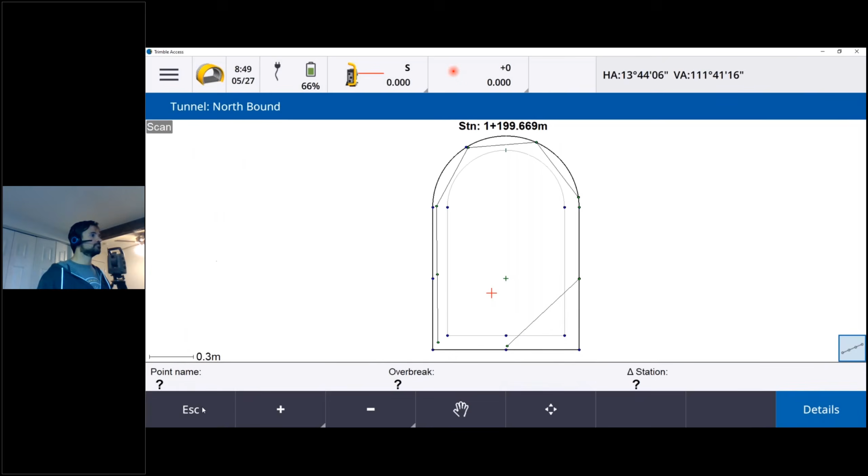Last piece is the reports. There's a few different reports in here - one of my favorites is the tunnel profile detail report. I'll click on that, view created file, and press accept, and that should pop up. It's kind of simple, but you might need it anyways in the field. If you have to report immediately something to the contractor or whoever it is, you can quickly generate this report in Trimble Access, which will give you the underbreak, overbreak, and the station values as well.

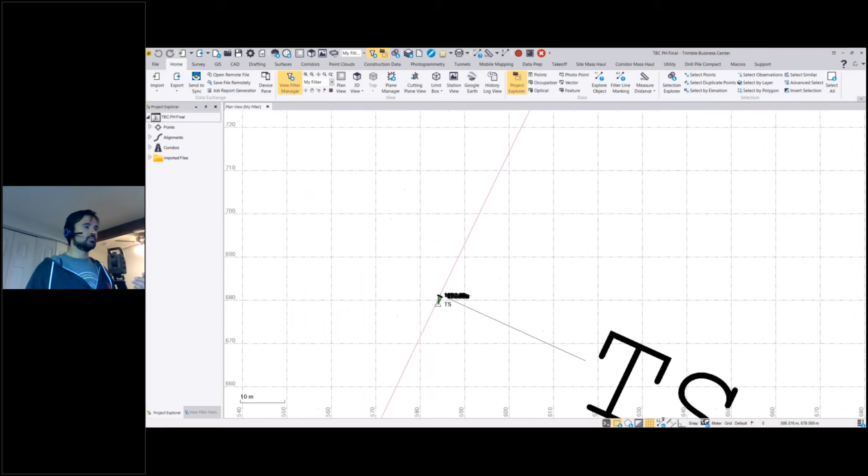All right, so we've covered all of that in Trimble Access. Now let's go back to TBC, where we've brought that job file from Trimble Access back into TBC. So we've still got our tunnel design - I labeled the alignment here with some station values, but I imported that job file, so I've got some as-built points in here. The reason why I want to show this is to close off the workflow. We've done the data prep design work, we've done the in-field staking, as-built collection, and now back in the office, I want to do a little bit more complex analysis.

So we want what is probably one of the primary deliverables on most NATM projects for the surveyor, which is the as-built, or the over and under break report. So the first thing that we need to do is assign tunnel points.

Now, why this is important is we're assigning data, assigning as-built points to the design. So when we do the report, it has only those specific points associated to the overbreak and underbreak.

Under the selection method, there's a few different ways of doing that. In this case, we're going to use job file, which is simplest, especially if you're using total station data. But if you're using an SX10 or an X7 and you've got scan data of that surface, you could also do it from a point cloud.

I don't have it, but for example's sake, you can specify all of this information, such as which point cloud, and the search distance. So essentially it's sampling out that point cloud to take a point every 0.5 meters at this interval, doing the same as-builting with scan data as you would with a total station. So some flexibility on how you want to do that.

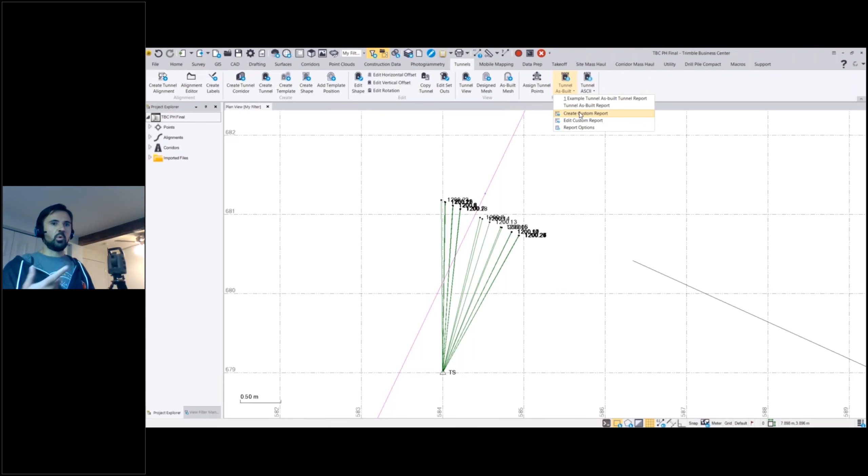Now to create the report, I can go to Tunnel As-Built and run the Tunnel As-Built report. One thing that's really powerful is the custom report. If you want to tailor the overbreak, underbreak, as-built report to your specific requirements, maybe there's some information you don't need, or you need to add some, or add a logo, whatever it is, you can use the custom report feature, which allows you to edit the report template in Microsoft Word and use that in future reporting scenarios.

In this case, I do have one that I've created, shown here, but we're just going to use the standard one. So we'll run Tunnel As-Built Report, select the tunnel and which points we want to use, and then the tolerances. I've got some tight tolerances here just because I want to show what overbreak and underbreak looks like, and you can change the colors of what overbreak and underbreak will look like. Once we're happy with those settings, I usually go with the defaults other than the tolerances.

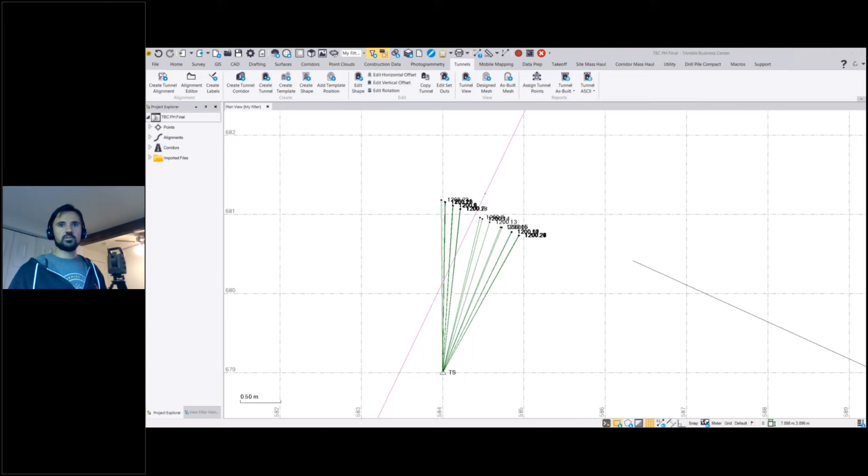I'll hit OK, and that will run the report and open it in Microsoft Word, except it opened on my other monitor, so let me drag that over. All right, here's the as-built report.

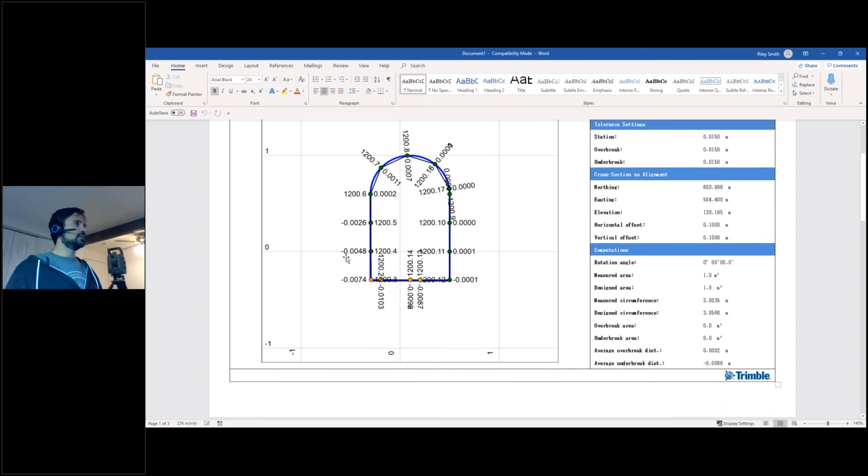On the right-hand side we have some data about that specific cross-section: what's the coordinates of it, what station is it at, the settings, some of the computations, so areas, circumference, all of that data here. On the left-hand side is a graphical view of that overbreak, underbreak. Some really good information there.

The yellow or orange values, however you look at that, are any points that were out of the station tolerance. If they were red, they're outside the overbreak and underbreak tolerance, and you can see that when I scroll down, those points are highlighted in red here. The station delta is out of tolerance in that list.

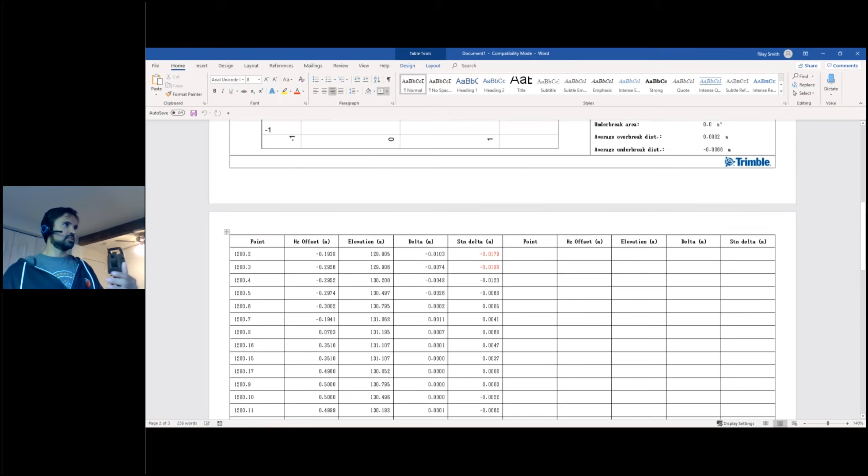Now if you had multiple as-built profiles, it would create one of these, a set of these two pages, for each profile automatically. In this case, I only have one. It would also calculate areas and volumes, but since I only have one profile, I'm not getting any volumes. If I had multiple, it would create the volumes between those profiles.

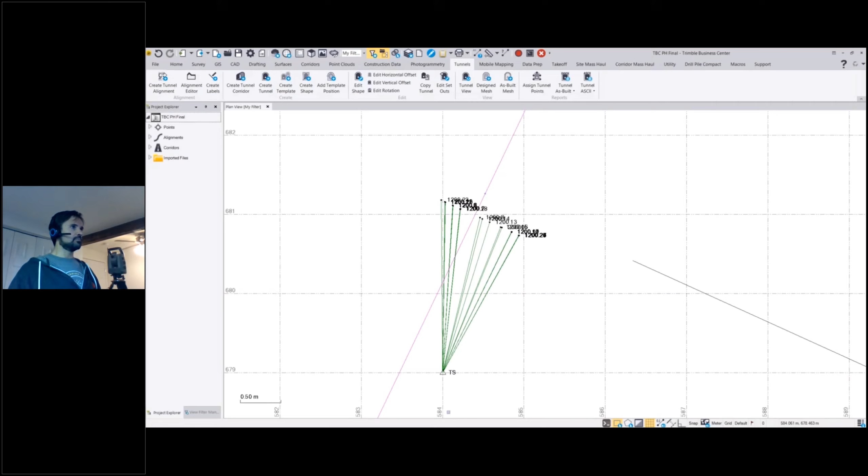Cool, we've got 5 minutes left, so I think with that I'm going to finish it off. The last thing I'll say, I didn't get much time to get into this, and maybe if there's an outcry and people want to see it, we'll do another webinar in the future.

Tunnel designs and tunnel data in TBC are also supported with the drafting module. So for instance, if you want to create cross-section sheets of a design, let's say, I'm just going to try and pull up a quick example. Both cross-section, plan, and profile, any of those types of drafting templates, can be applied to a tunnel as well.

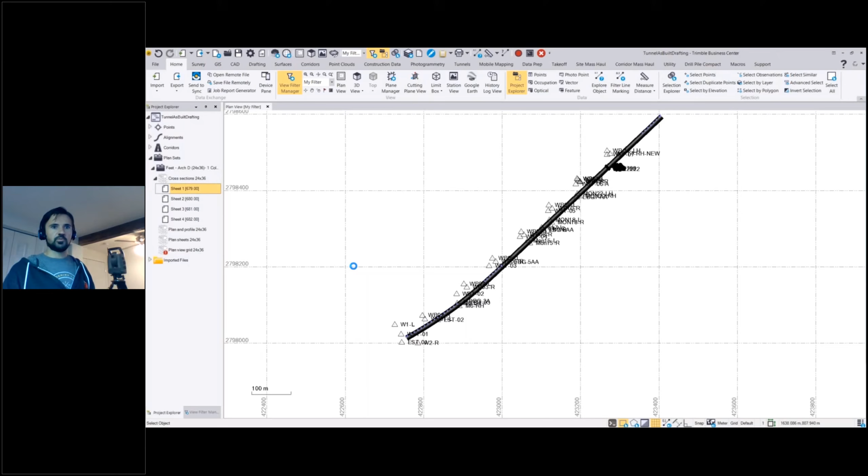So I just built the sheets, and we'll take a quick look at what that looks like. For instance, if you want to have your own sheet set, and apply a template to it and all that, you could create that in the drafting piece of TBC as well.

So it's got a lot of that similar information. We've got a point table, and we've got the design showing the overbreak and underbreak here as well.

And so with that, I think we'll move back to the presentation. Let me just pull that up. I needed a reverse one of Mario coming out of the tunnel here. All right, go back to present.

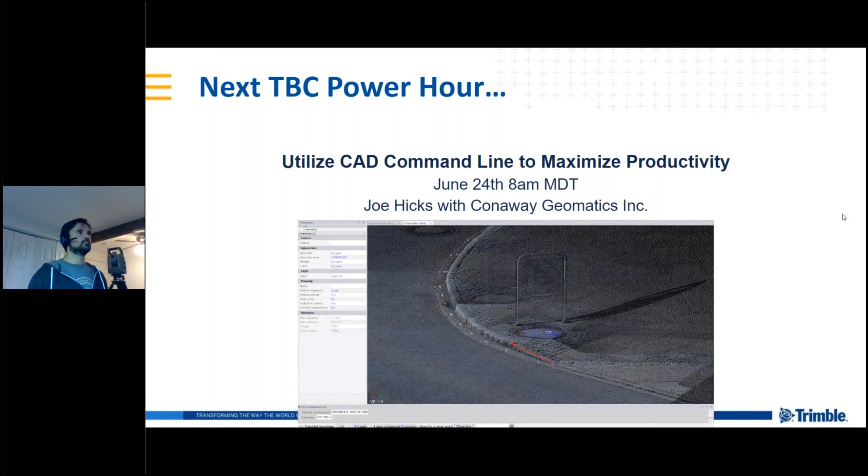With that being said, we'll hop into the questions. I know there's some good ones that came in.

I did have a comment about not being able to see my screen, so I hope most people were able to see it. If not, we can definitely think of ways how we can get the presentation to you folks after. Yeah, I think it was showing for the most part. I had one gentleman that tried it again, and it was just a switch of the setting, so he was cool. Good. All right, let's see if we can get to some.

There's a lot of good ones, and I appreciate the feedback from everybody. So let's see, there was one question, and it would be great if we get some clarification on what exactly we're looking for. But the question is: more information on TBC for long curve pipe jacking.

So I guess if you could provide some additional information on what exactly you're planning to use TBC for in long curve pipe jacking. What I'll say is, just to inform everyone, with long curve pipe jacking you've got these sections of tunnel being built around a curve, and in TBC, the simple way to put it is you can design and input any of that data from the official design for that tunnel to do the data prep. So just like we were doing today, you can input the alignment, you could import it from a CAD file. If your alignment came in from DXF, you could import that, and you can define the shape of the tunnel, no problem, along with all that information.